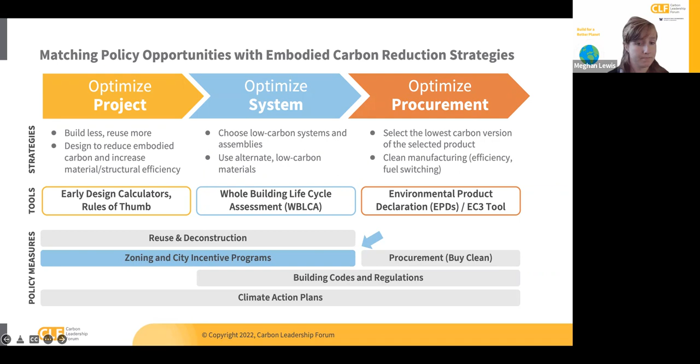First, I want to start by summarizing a couple of areas where cities have control and influence: land, infrastructure, and buildings. The amount of influence that cities have varies heavily depending on the country and state or province you're located in, so be sure to research your own jurisdiction.

Cities commonly own significant amounts of land, all the buildings required for their own operations, as well as public buildings like libraries and schools, and importantly own most of the underground and ground level infrastructure like sidewalks, pipes, and water treatment systems that can be enormous sources of embodied carbon.

In addition to the assets that they have direct control over, cities also exert a large influence on what type of buildings get built and the design of those buildings through zoning and permitting. In this session, we're going to focus more on the land, infrastructure, and buildings that cities can regulate. I recommend the procurement policy session for thinking about some of the city-owned buildings and infrastructure.

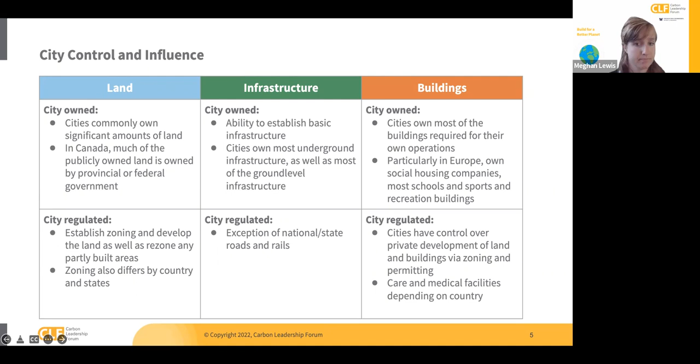Zoning and land use regulations govern how land can be used, establishing rules for what can be built, whether it's a park, a residential building, retail, etc., as well as other attributes like how tall a building can be, how close buildings can be together, and much more. Keep in mind that zoning privileges vary widely across countries, and within the US, for example, many smaller towns and some larger cities do not have zoning regulations.

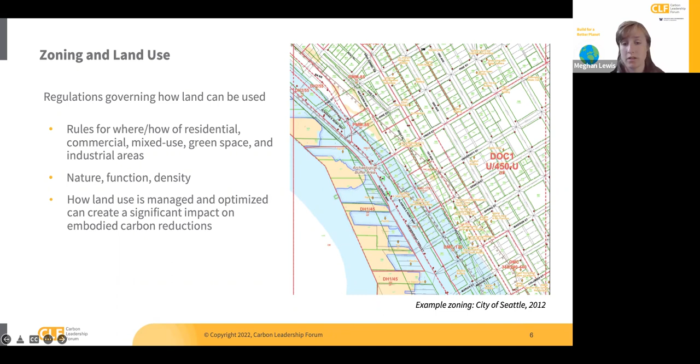Another type of program we'll focus on today is city planning incentive programs, which are a broader group of voluntary policies that are a complement or precursor to phasing in regulatory requirements.

Cities have rights to raise revenue by taxing property and also lead the permitting process, which gives them a range of subsidies, performance rebates, and other tools, as well as incentives like expedited permitting or plan check time, fee reduction or waivers, and density bonuses.

These incentive programs can help test requirements and act as case studies before broader adoption, while increasing external capacity and awareness around an issue before broader regulations are adopted. They're also used frequently to incentivize developers to pursue green building, affordable housing, and other benefits currently, and embodied carbon can be integrated into those programs.

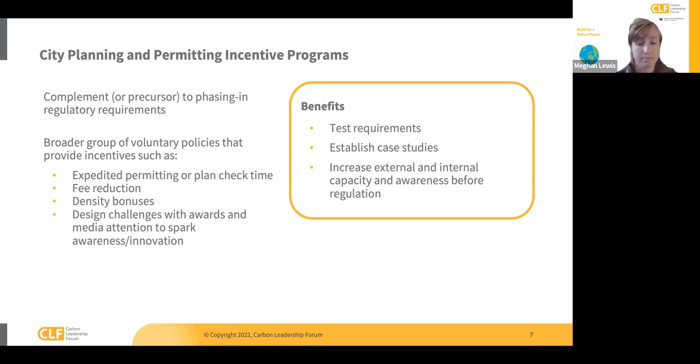We've grouped these types of policies together because of their unique influence early in the design process, when the largest range of reduction opportunities for embodied carbon emissions exist. We think that the opportunity for zoning to play a critical role in reducing embodied carbon will only increase as we better understand the relationship between building size and other attributes and embodied carbon.

On the right, you can see some examples of policy instruments and a report from the Carbon Neutral Cities Alliance that includes over 50 examples of city policies to reduce embodied carbon. We really recommend that as a great resource to complement this presentation, and we'll cover some of the case studies included in that report today.

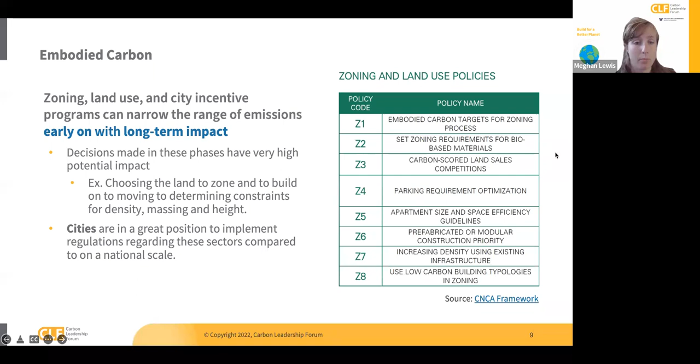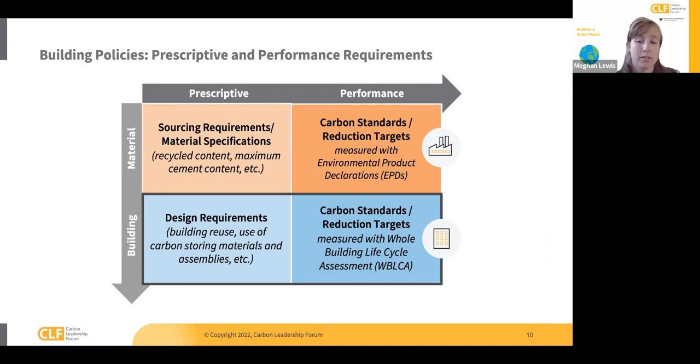If you watched our first session on introducing the embodied carbon policy landscape, you'll recognize this slide highlighting prescriptive versus performance approaches for both material and building level policies. Again, these types of policies are complementary, but today we're going to focus on building level policies for the reasons described earlier related to city influence over the building design process.

First, I'll briefly describe performance-based policy approaches to reducing embodied carbon at the building level. This type of policy allows for the broadest set of strategies available for reductions, capturing strategies like building material reuse, use of carbon storing materials, or other system level design changes, and the reductions in carbon from structural or material efficiency, as well as

Strategies that are still available later in design, like selecting lower carbon concrete mixes or other products. In action, this would look like setting a building carbon budget, like a kilograms of carbon dioxide equivalent per square meter value for different building types, or setting percentage reduction requirements from a baseline, and then requiring the results of a whole building LCA to be disclosed during permitting or a similar checkpoint to verify compliance.

The City of Vancouver Green Building Rezoning Policy is a great example of this, and we'll describe it in more detail in the next section.

It's important to note that compared with material-focused policies like Buy Clean, which require leadership from the contractor and manufacturers, compliance with building level policies like the one described on this slide are led by architects, engineers, sustainability consultants, and others on the design team. And they fundamentally incentivize different types of strategies.

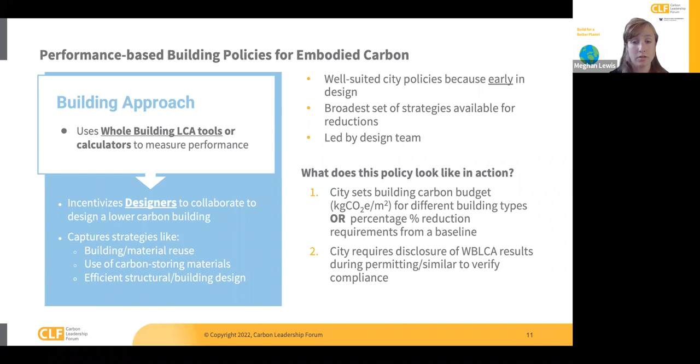Policies can also use prescriptive requirements, requiring or incentivizing a predetermined list of strategies or a single strategy that is known to reduce embodied carbon. Some examples are zoning requirements for carbon storing materials, parking requirement optimization, apartment size and space efficiency guidelines or requirements, and zoning for lower carbon building typologies.

While prescriptive policies are easier to implement, they don't necessarily allow for project-specific approaches or reward innovation. But one of the policy instruments well suited to prescriptive strategies that we're still exploring is incentive programs, since they can inspire teams to test new strategies.

For example, using emerging technologies such as newer carbon storing materials will require additional coordination between the owners, designers, and builders on a project. And this can be perceived as a risk, whether to the schedule or to the project as a whole. Incentive programs can help push teams towards strategies that they may be interested in pursuing, but need a little nudge to actually take that step for something that could be perceived as a risk.

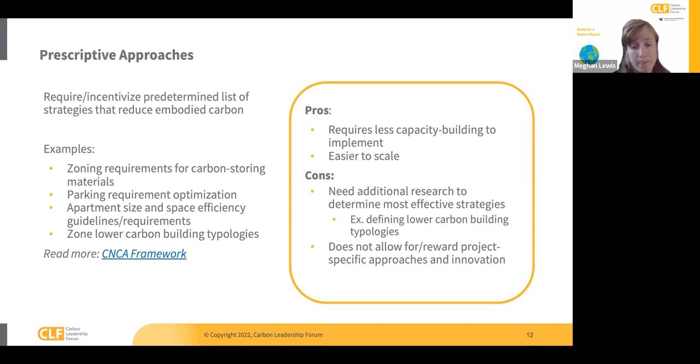We'll quickly share 3 examples of zoning and land use policies targeting embodied carbon, and then 2 city incentive program case studies. And we've also provided some additional examples that are linked on this slide and later in this presentation.

First, the City of Vancouver initiated a green buildings policy for rezoning established in 2017. And it's a great example of the performance-based building approach to reducing embodied carbon I described in the previous section. In addition to influencing buildings impacted by this rezoning policy, the city laid out in its climate emergency plan how this policy could influence other related policies.

The first phase, which began in 2017, requires only disclosure of a building's embodied carbon footprint. So it requires that all projects report the embodied carbon of each building in kilograms of carbon dioxide equivalent per square meter, as calculated by a whole building life cycle assessment.

The policy provides detailed guidelines on how to perform this whole building LCA, which are in line with the LEED Green Building certification credits related to whole building LCA, encouraging harmonization across how designers calculate embodied carbon using whole building LCAs.

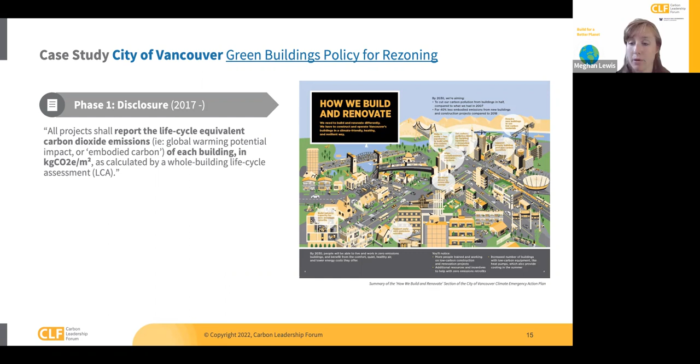The next phase will begin sometime in 2022, when the city will set percentage reduction target requirements from a baseline. These targets will then be updated approximately every 5 years, along with the guidelines around how to set a baseline for each building.

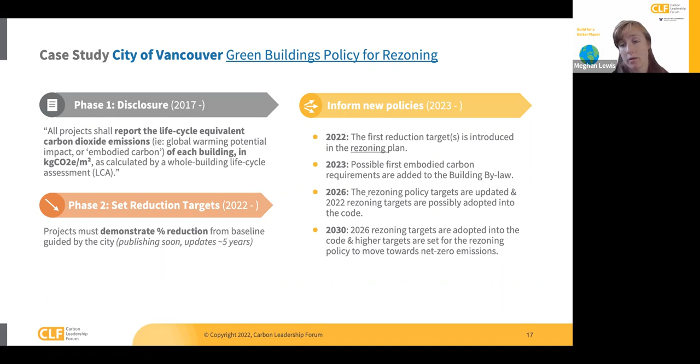Last, as I mentioned above, Vancouver intends to use what they learned from this policy to inform other types of policies, including possibly adding embodied carbon requirements into the building bylaws as soon as 2023, and possibly adopting the 2022 rezoning targets into the building code in 2026. Over time, these would continually lower in a process of impacting first rezoning, then building bylaws, then the code.

The next case study, in Helsinki, is an example of a prescriptive policy requirement that designates zoning requirements for using wood in several districts, with the goal of increasing the use of carbon storing materials. The district zone of Honkasuo required that all buildings must have a wooden frame and facade. In this photo, all of the wood is supplied from Finland.

Alternatively, regulations could set a minimum share of biosourced material, such as requiring that the primary structural frame of the building must be wood or biosourced for 75% or more of the building by floor area, and other requirements.

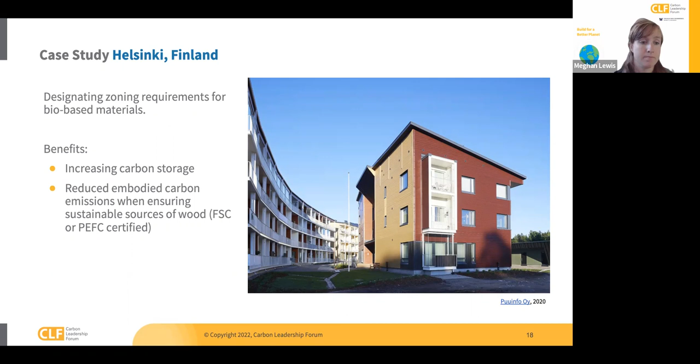This slide shows example language from the policy. In addition to the wood requirements, the language also highlights the need for disassembly and reuse in other buildings, encouraging circular design and material reuse, and requires that at least 50 kilograms of the wood be sustainably certified.

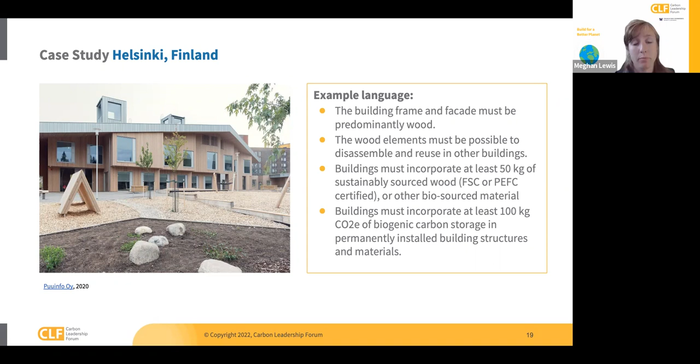Next, I'll provide a couple examples of city incentive programs that include embodied carbon. On this slide are the proposed requirements for the Priority Green Expedited program in the city of Seattle, which shortens the time it takes to get a construction permit in exchange for meeting a green building certification program and other criteria. The program sets goals for energy efficiency, embodied carbon, indoor air quality, resource conservation, and lead hazard reduction, including requirements for collecting EPDs for concrete and primary structural steel frame elements, as highlighted here.

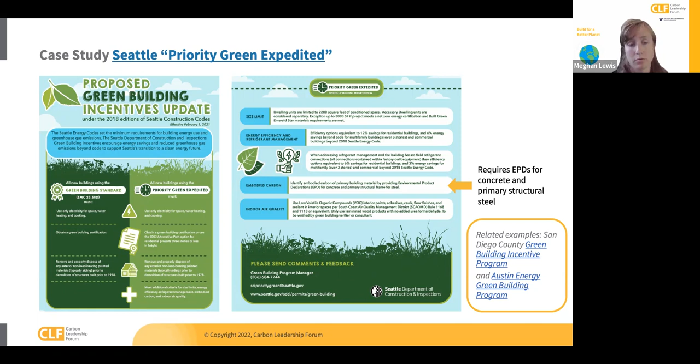There are many similar versions of this program, particularly those focused only on incentivizing green building certifications like LEED, which often include embodied carbon credits. So that wouldn't necessarily guarantee that embodied carbon reductions are a part of every project, but it could be one of the pathways that teams take in order to comply with a green building program.

And last, the city of Somerville in the Boston area updated its zoning ordinance to encourage buildings to decarbonize by following the incentive structure that was successful with affordable housing density bonuses.

This is another example of how embodied carbon reductions can be achieved alongside operational carbon reductions through incentivizing green building certification programs. In addition to the LEED certification requirements in the ordinance, developers can increase the unit count of their buildings if they achieve net zero ready status, which includes a pathway based on achieving the Living Building Zero Carbon certification, which requires both embodied and operational carbon reductions.

While direct incentives to incentivize embodied carbon reductions, rather than through green building certification programs, are more appealing for guaranteeing that embodied carbon is a focus, it's important to recognize that leveraging existing certification programs can help reduce the implementation and verification burden on small teams of city officials who have a huge variety of responsibilities and may not have the technical or financial capacity to verify some of the requirements that a larger city with more staff may have the capacity to implement at this time.

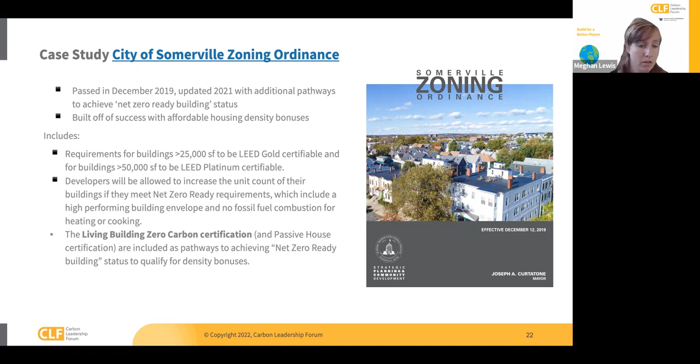So in summary, some of the major takeaways are that zoning, land use, and city incentive programs can reduce the overall embodied carbon of a project early on with a really large long-term impact. Cities are in a great position to implement regulations regarding these sectors compared to a national or state scale because of their jurisdiction over the design process. And there are many both performance and prescriptive policy approaches to reducing embodied carbon through zoning requirements and city incentive programs.